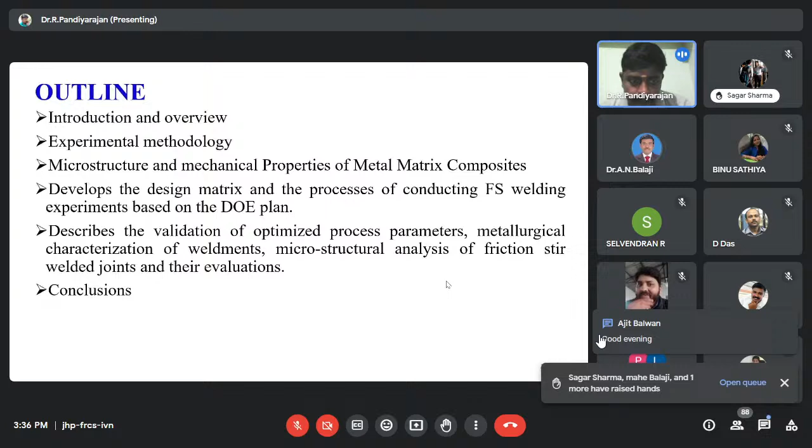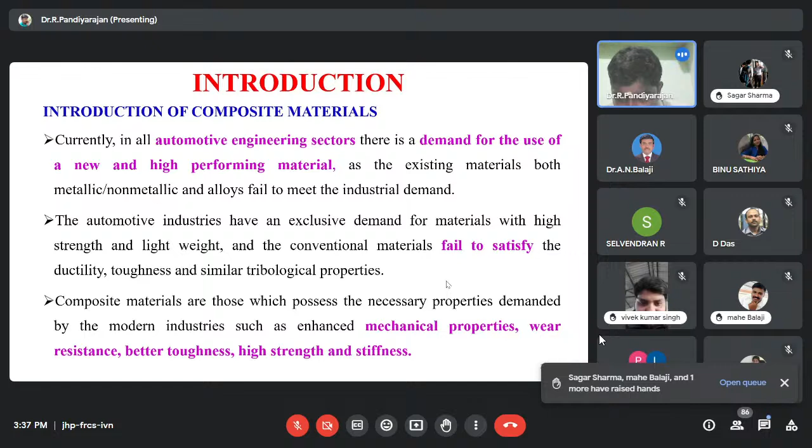The introduction of composite material: recently, all automotive engineering sectors demand new and high performance materials, but conventional non-metallic materials or alloy materials still do not satisfy the current engineering demand. So all industries focus on finding new composite materials. Composite materials alone satisfy the current engineering demand for particular properties, like mechanical properties, tensile strength, hardness, wear resistance, better toughness and high strength.

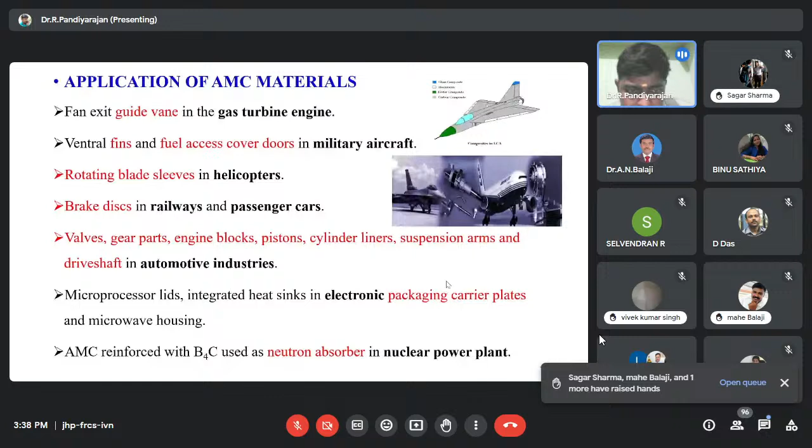The application of aluminum based composite material: there are few applications. Gas turbine engines use it particularly in guide vanes. Military aircraft use it in fins and fuel access door covers. Helicopter industries use it in rotating blade sleeves. Railways and passenger cars use it to fabricate brake disc pads. Automotive industries use it in various parts: valves, gear parts, engine blocks, pistons, cylinder liners, suspension arms, and drive shafts. Electronic packaging industries also utilize aluminum based composite material, particularly in microprocessor lids and integrated heat sinks. Boron based aluminum composite material is particularly used in nuclear power plants in neutron absorption systems. These are a few applications of aluminum based composite materials.

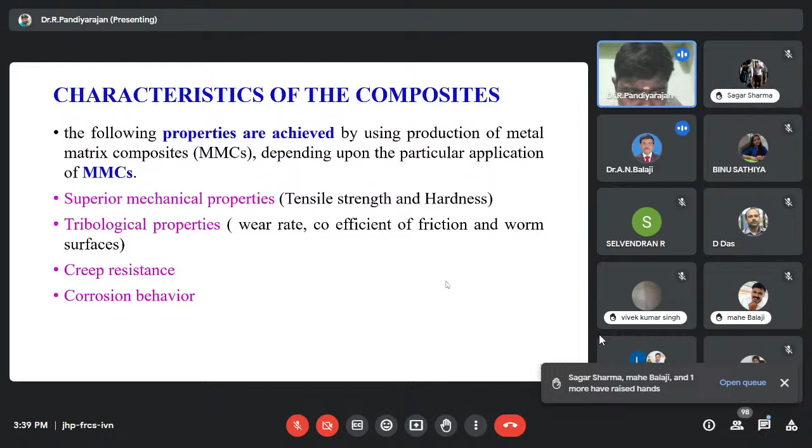The basic characterization of composite material is: compared to base metal alloy, the aluminum based composite produces maximum strength of the material. The basic properties are superior mechanical properties, tensile strength and hardness, tribological properties like wear and coefficient of friction, worn surface analysis, creep resistance, and corrosion behavior. This is the basic characterization of composite materials.

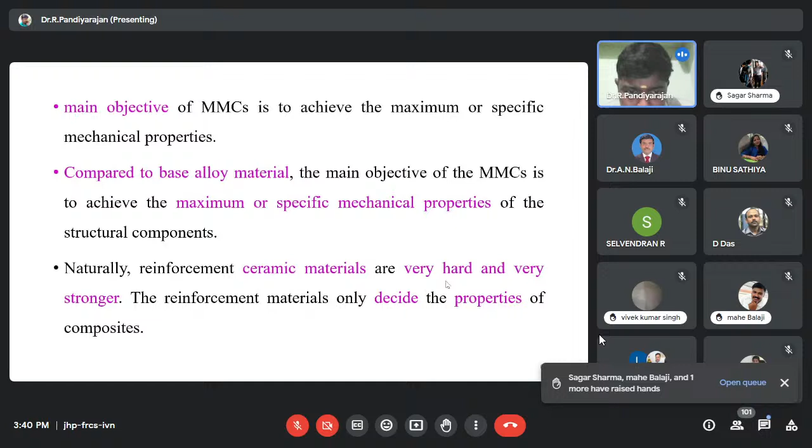The major objective of composite material is, compared to base metal alloy, to achieve the maximum or specific mechanical properties of the structural component. Naturally, ceramic reinforcement particles are very hard and stronger materials, and they alone decide the properties of the composite material. So researchers focus on particular ceramic particulates in the composite material, since the reinforcement particulates alone decide the properties of the composite materials.

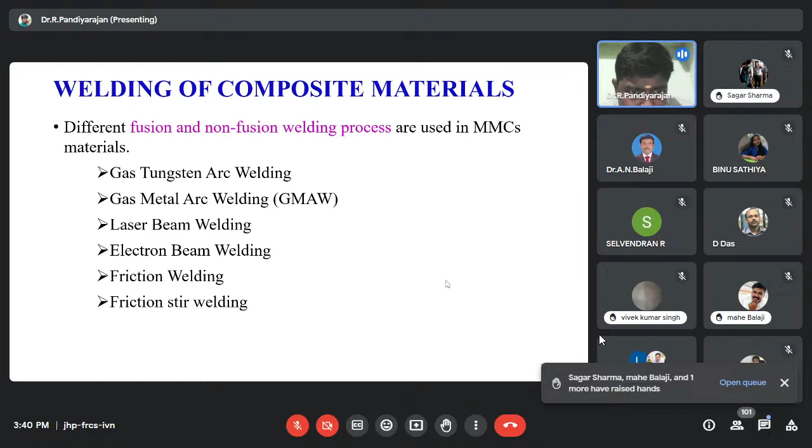There are different kinds of welding processes utilized for composite material. Particularly, there are two types: fusion and non-fusion welding processes mostly utilized. Gas tungsten arc welding, gas metal arc welding, laser beam welding, electron beam welding are fusion processes, and friction welding and friction stir welding are non-fusion processes.

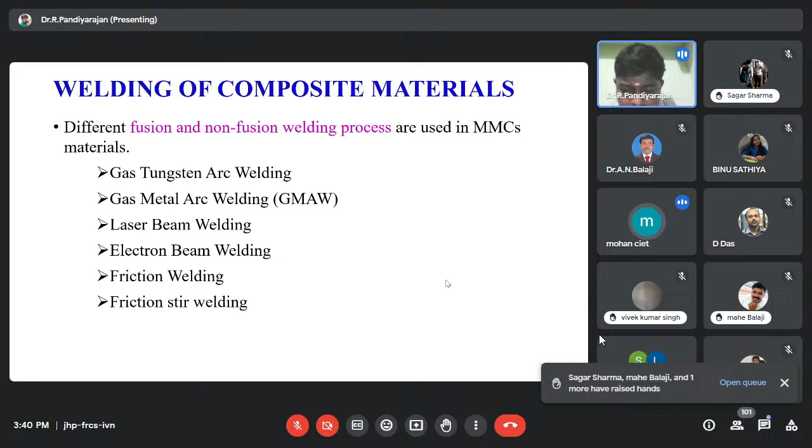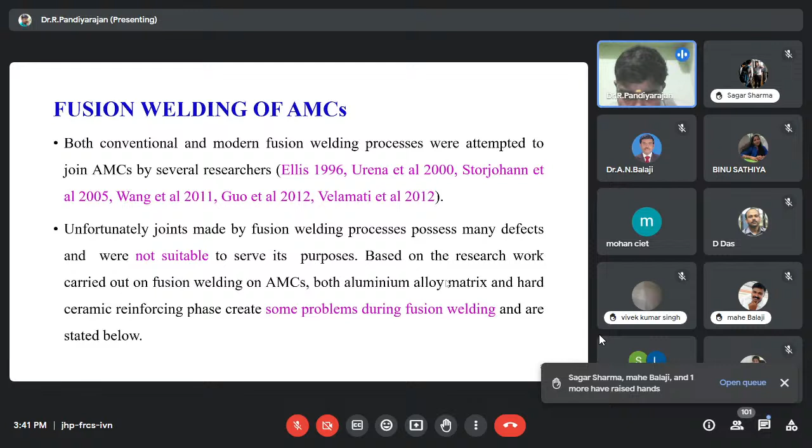From 1996 until 2023, many researchers have worked on fusion welding processes, but many researchers concluded and reported that fusion welding is not suitable for aluminum based composite materials due to some problems during the fusion welding process. Particularly, there are two problems that occur in aluminum based composite material during welding: the first problem is the problem associated with aluminum matrix materials.

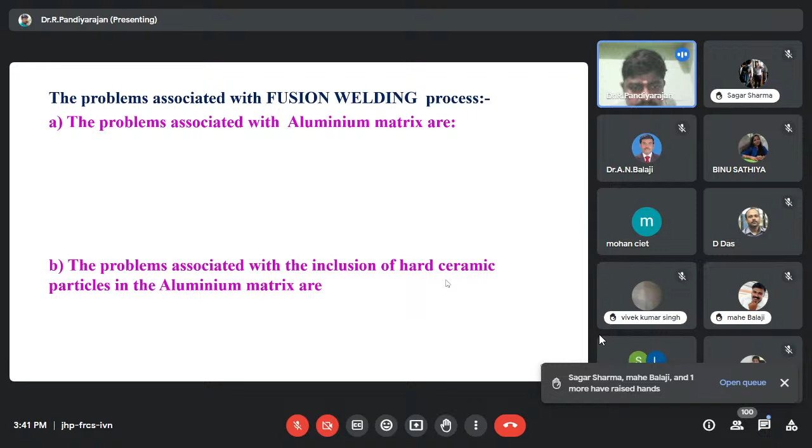Second problem is the problem associated with inclusion of hard ceramic particulates in aluminum based composite material. The first problem is aluminum matrix problem: high thermal expansion, high thermal conductivity, solidification shrinkages, incomplete mixing of parent and filler materials, coarse grain structure of weld zones, and the presence of oxides in situ. This is the major problem associated in aluminum matrix materials.

And the second problem is the reinforcement of hard ceramic particulates. There are two major problems: mismatch of coefficient of thermal expansions and the chemical reaction.

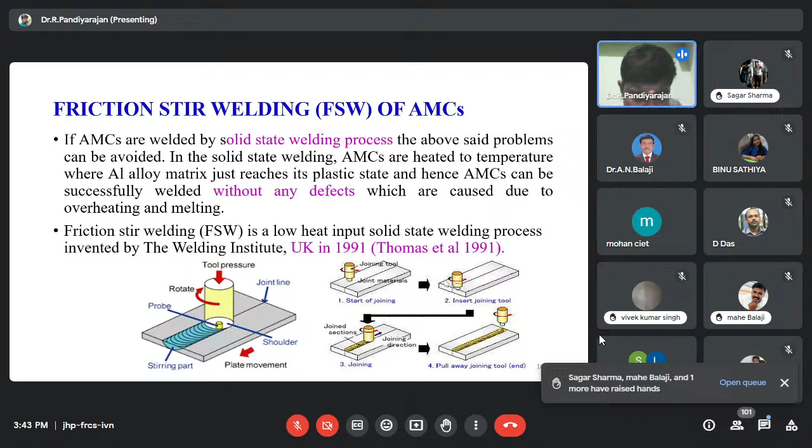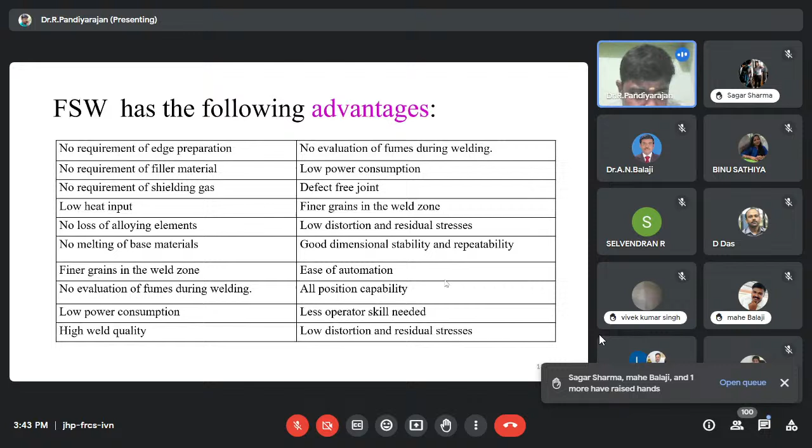There is no requirement of edge preparations, no requirement of filler materials, no requirement of shielding gas. There are many advantages in friction stir welding process.

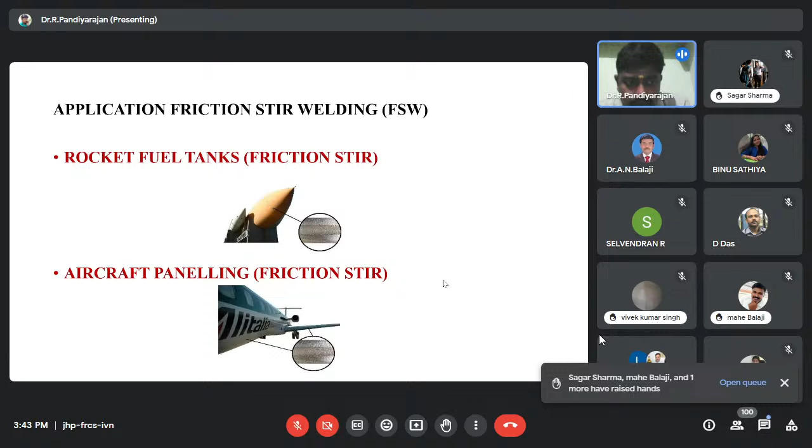Particularly, the friction stir welding process application is mostly utilized in aerospace industries. This is the sample images of aerospace engineering used in friction stir welding process.

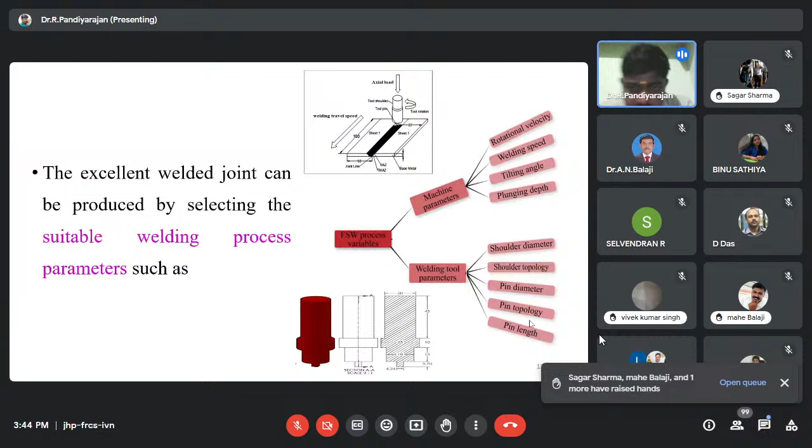Next major influencing parameter is tool parameter. The tool parameters are shoulder diameter, shoulder topology, pin diameter, pin topology, and finally pin length. These are the major influencing parameters of friction stir welding process.

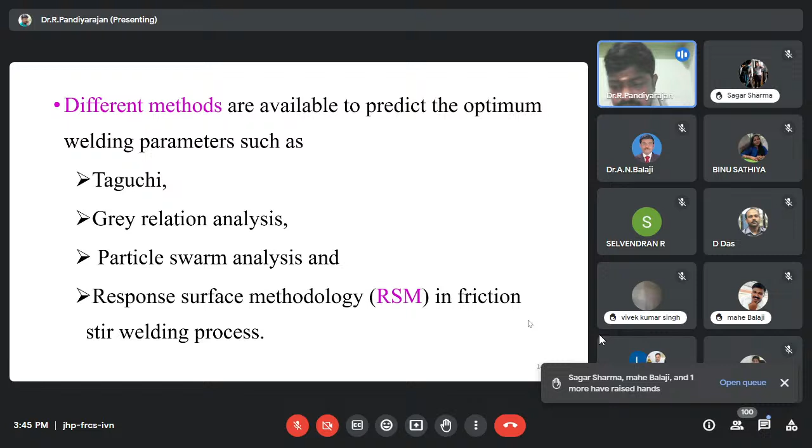There are many methods to find the optimized friction stir welding process parameters, which are the most influenced parameter to find the optimum solution. There are many techniques available in recent days: Taguchi method, gray relation analysis, particle swarm analysis, and response surface methodology. Compared to other methodologies, the RSM methodology is the easiest to find the optimum solution for influencing the input parameters of the friction stir welding process.

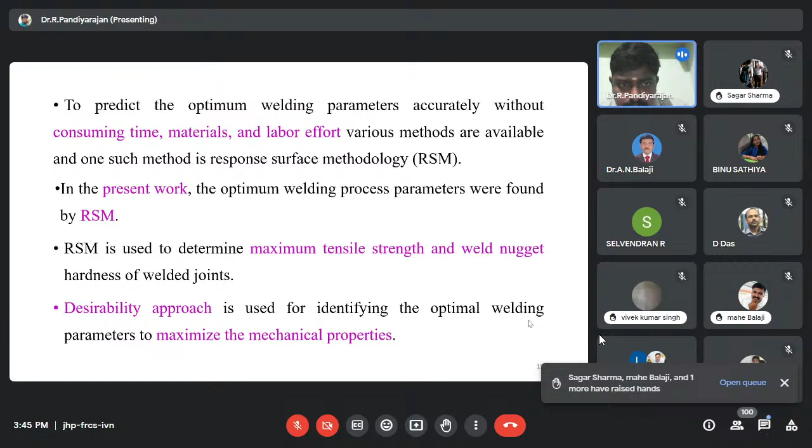The RSM methodology maximum utilizes design of experiment software. There are various types of versions of software utilized in recent days, version 8 to version 10 available. The goals or objectives for responses are expressed in terms of optimization, represented by numerical and graphical representations.

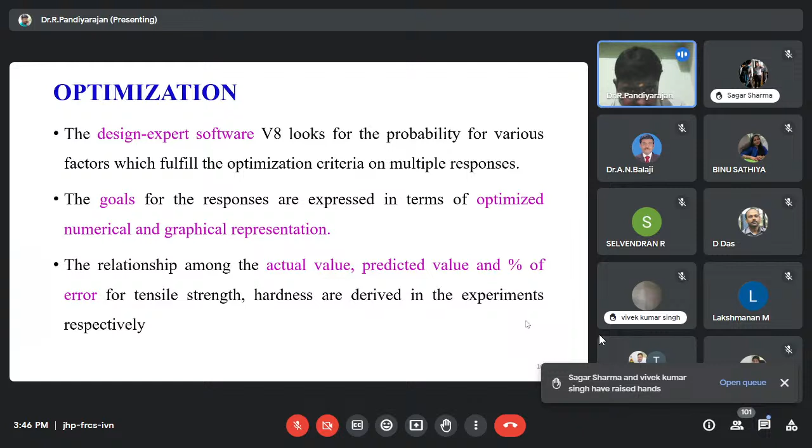The relationship among actual and predicted values, and the percentage error value, are also calculated from the output responses of tensile strength and hardness derived by the DOE experiments respectively. The actual values are pure experimental results.

The predicted value means: once we develop the DOE, find the number of experiments, do them using the experimental method, and find the mechanical characterization. Tensile strength and hardness values are input to the DOE, which directly finds the mathematical equation.

Once the session is over, I will display with the design of experiment software how we will use it. I will demonstrate at the end of the session.

Once we develop the mathematical equations, the contour plot is used to define and superimpose or overlay the critical responses, making visual search possible.

Once we find the optimum solution for the friction stir welded process parameter, we again have to test it with an experimental validation test result. The validation result is very important.

Once again, we make 3 to 5 trials one more time, compare experimental and predicted values, and also find the percentage of error. The percentage of error less than 5% means we can definitely use the optimum process parameter, producing good quality welded joints.

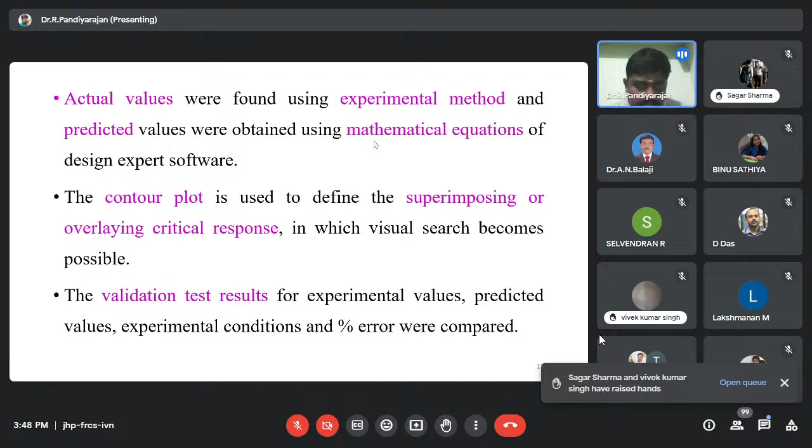This is the overall experimental methodology followed for metal matrix composite using the friction stir welding process parameters. The first step is material selection. The composite material selection is very important in research.

The composite material consists of two materials: one is a matrix material, another is a reinforcement particle. The matrix material is particularly chosen from your application point of view. For this session I will take AA6061, a wrought alloy, as the basic alloy. We use this matrix material along with reinforcement particulate. This session I will use two types of reinforcement particulate. One, the primary reinforcement particulate, is ZrO2, and the secondary reinforcement particulate is graphite. This is the material selection.

Second is the fabrication of metal matrix composite material. There are different types of fabrication methods available in metal matrix composite material, but this session we focus on the stir casting method, because this method is available in many engineering colleges in Tamil Nadu, so we use the stir casting method. Once we fabricate the metal matrix composite material, we find the characterization of the metal matrix composite material at different weight percentages.

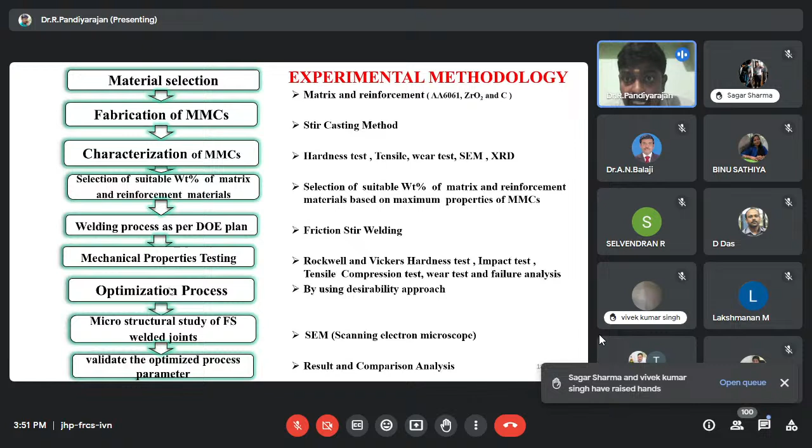Once the mechanical properties are done, we input them to the optimization technique to find the optimized process parameter, and we also find the mechanical and metallurgical characterization of the welded joint. This is the overall flow of friction stir welding of aluminum based composite materials.

This is the example of selection of matrix material. This session I will consider only AA6061 alloy, a basic wrought alloy. AA6061 alloy is selected as matrix based on better thermal conductivity, low density, easy processing, and better castability and weldability of the material. Once we buy the AA6061 alloy, we definitely find how much percentage of each composition is in the material: silicon, ferrous, copper, magnesium. You find this by spectrometer analysis, confirm the composition, and confirm the wrought alloy.

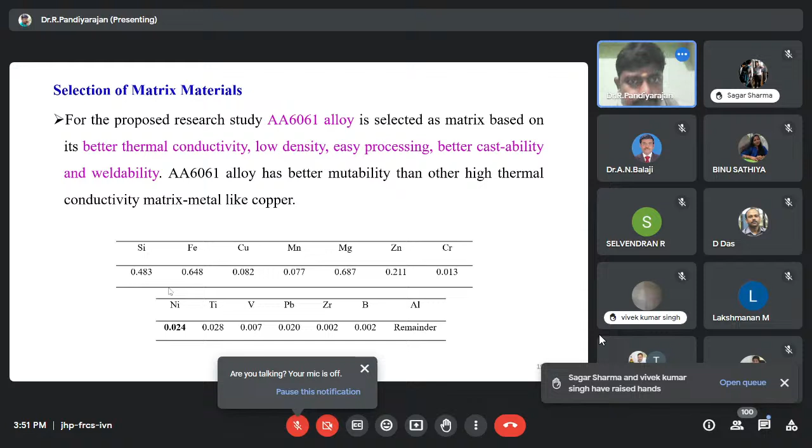AA6061, and the selection of reinforcement particles - this is the most important session, choosing the reinforcement particulate. This session I will consider two types of reinforcement particulate: ZrO2, zirconium dioxide, and graphite. ZrO2, zirconium dioxide, has the most responses in multi-industrial and technological applications in recent material studies. This is due to its immense mechanical properties, low thermal expansion, less cost, and thermal conductivity also. ZrO2 is only used to improve the mechanical properties of the composite material, and we also utilize graphite.

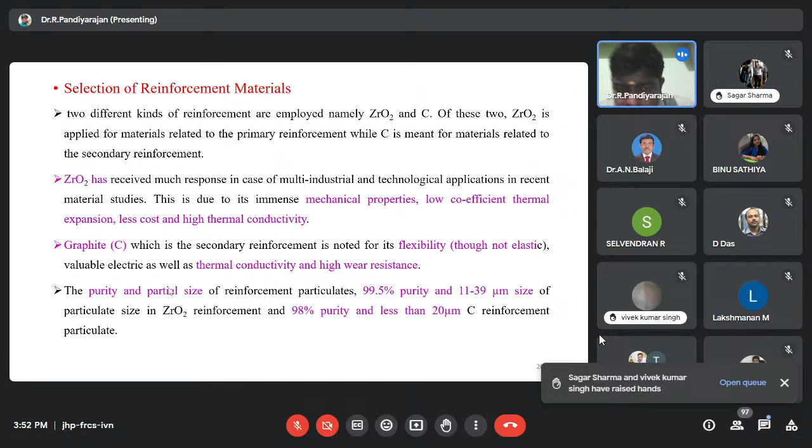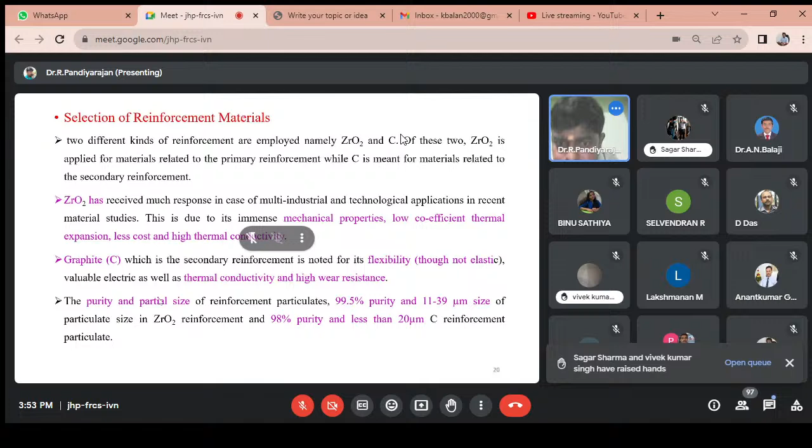Graphite is a secondary reinforcement particulate. It is used to improve the tribological behavior of the composite material. Once the researcher buys both materials, the matrix material and the reinforcement particulate, we definitely check the purity and particle size of the matrix and the reinforcement particulate. There are many types of purity available in the market. From a research point of view, we need more than 90% purity and less than micron size also.

Definitely measure that. After this, we fabricate the metal matrix composite material using the stir casting method. This is a sample experimental image of the stir casting method. The furnace is maintained at a minimum of 1000 degrees Celsius to 1500 degrees Celsius. Based on the matrix material, we set the temperature, and the stir speed is a minimum of 350 to 450 RPM, maintained within 5 to 10 minutes minimum.

It is compulsory that the reinforcement particulates are preheated to 350 degrees Celsius to 500 degrees Celsius, to remove the moisture content of the reinforcement particulate. Suppose you do not preheat the reinforcement particulate - there are many defects produced in the metal matrix composite material. So definitely you have to preheat the reinforcement particulate.

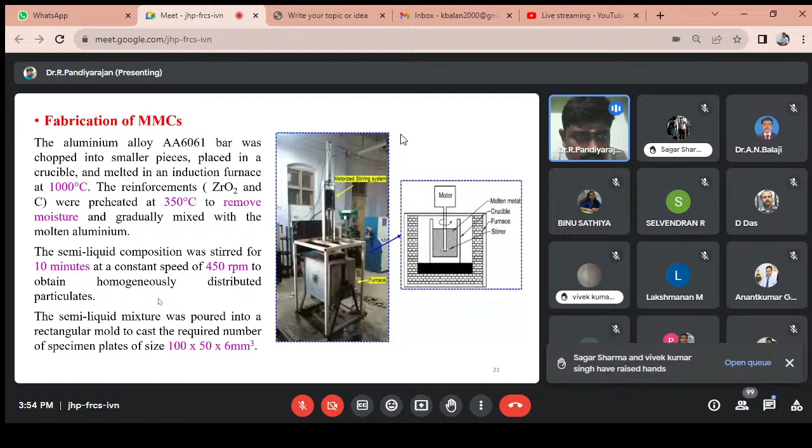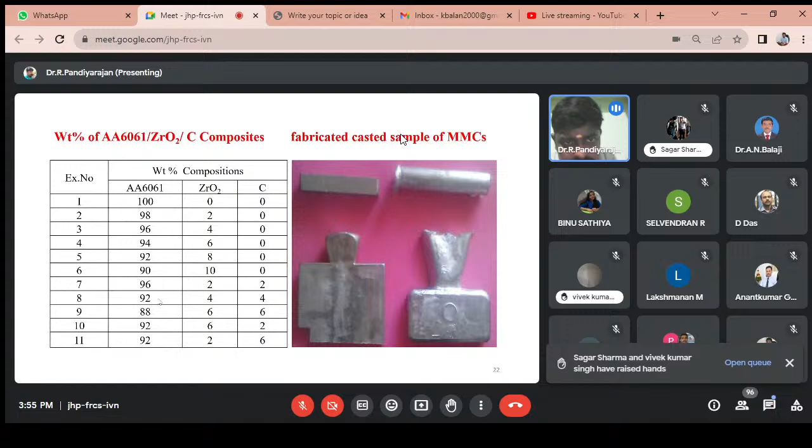For example, the first experiment, experiment number 1 to experiment 6, is a composite material adding only ZrO2 material. And from the 7th experiment to the 11th experiment, we conduct the hybrid metal matrix composite material, where we add both reinforcement particulates, ZrO2 and graphite.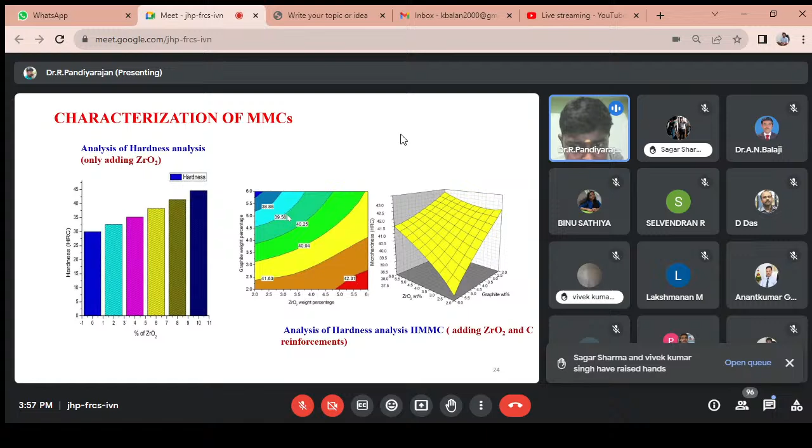Similarly, for the hardness analysis of the composite material, the x-axis shows the ZrO2 particle. The first image shows only ZrO2 particulate added in the metal matrix composite material, and the second and third images show the hybrid metal matrix composite material, as previously discussed.

The x-axis shows the ZrO2 particulate and the y-axis shows the graphite weight percentage. The z-axis shows the hardness value of the metal matrix composite material. This graph, in 2D and 3D plots, clearly shows which reinforcement mostly affects the metal matrix composite material.

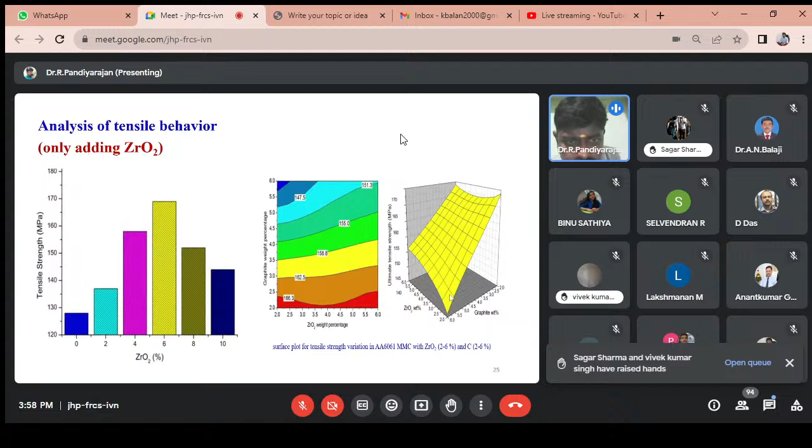The researchers do one thing: if you add only one reinforcement particulate, a bar chart or pie chart is enough - there's no issue. But if you fabricate a hybrid metal matrix composite, you have to show 3D and 2D contour plots, which means your paper will definitely be accepted in the highest ranges of SCI, Q1 and Q2 journals. Do the research work properly and the best paper will be accepted in many reputed journals.

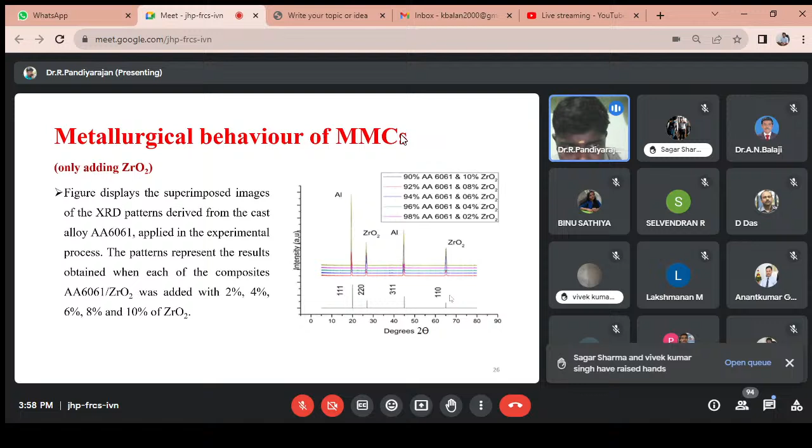Only adding ZrO2 particulate - this is the example diagram. Next, the image shows the hybrid composite material adding ZrO2 and graphite particulate. Both XRD values are compared with the standard value in JCPDS data.

The JCPDS data is very important - it's a standard data. In an XRD pattern, it definitely shows peaks - how many peak values, how many percentage will occur in the composite material. The standard data is there in JCPDS data, so you compare with your result and the result will be confirmed.

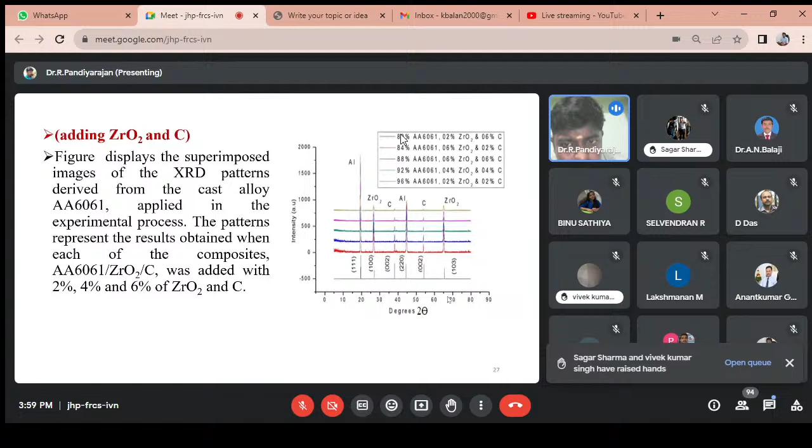Suppose any error occurs in the polishing method or roughing method, to reflect this JCPDS data, we will modify the result and take the test again.

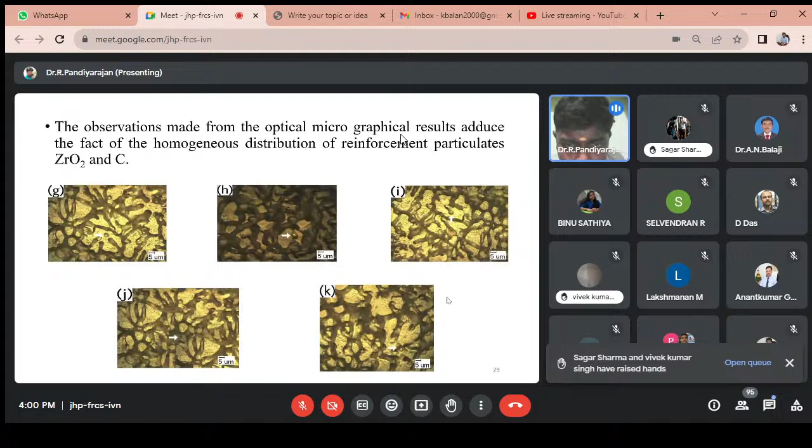Similarly, this is only a magnification difference. Our previous images show the OM analysis - optical microscope analysis - and the next image is a SEM analysis. It's the same.

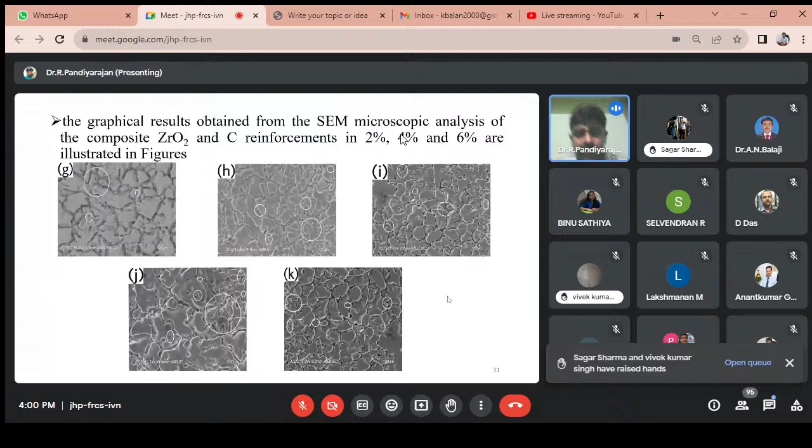Suppose you want to check the micron size or the grain size - there is an easy calculation. The circle is there, and you calculate the size. There is a formula to apply, and they find the number of grains in a particular size.

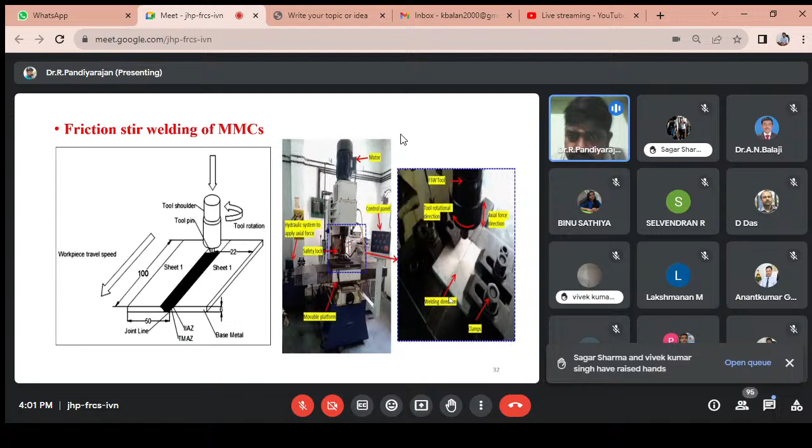This is the basic and fundamental process of friction stir welding. The first image is a principal diagram of the friction stir welding process, and the next is an experimental machine of friction stir welding. All the colleges have vertical milling machines available - you have to change them with some adapter to use them as friction stir welding machines also.

There are different types of tools used in the friction stir welding process. The tool material, high carbon and high chromium steel, was used to make the weld tool - specifically high carbon and high chromium D2 steel.

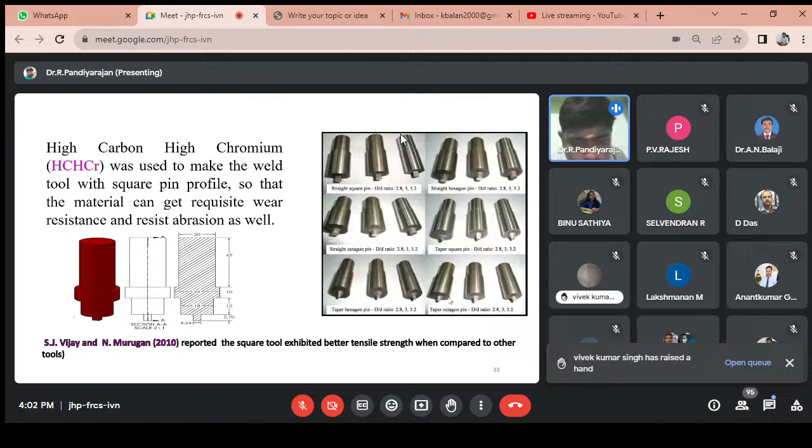In 2010, Dr. Murugan reported that compared to many other tools, the square pin tool maximized the tensile strength and produced high weld quality. Ashok Kumar from SRM Madurai campus, in a 2019-20 publication, also concluded in a session on tool parameter optimization that threaded and square pin tools only produce maximized tensile strength. So in this session we will consider the square pin tool utilized in the friction stir welding process parameters.

This is the friction stir process parameter optimization in stir casting of aluminum-based composite material. The Box-Behnken experimental design, with 3 factors and 3 levels, was used to minimize the number of experiments. By correlating the significant welding process parameters using linear regression equations, we determined the ultimate tensile strength and hardness of friction stir welded composites using statistical design expert software.

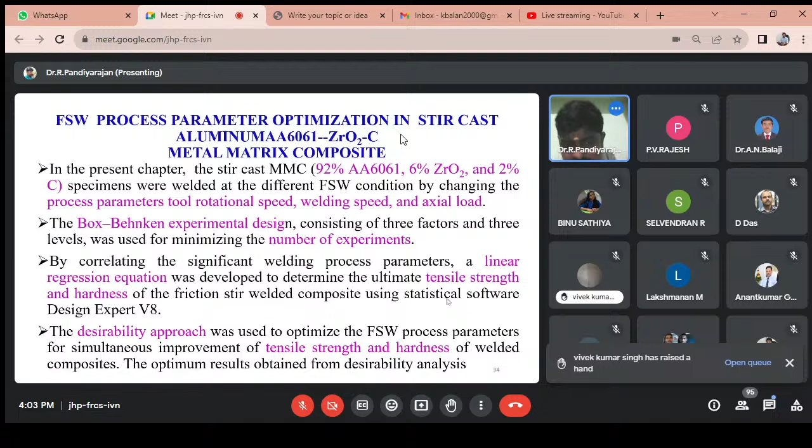The optimization technique and Box-Behnken method were used to find the optimum solution by applying desirability approaches, optimizing the friction stir welding process parameters for simultaneous improvement of tensile strength and hardness of welded composites. The optimum result was obtained from the desirability analysis. This is the systematic approach followed to find the optimum solution for friction stir welded aluminum-based composite material.

Step number 1 is material development. This means we have to fabricate the composite material. We have to prepare it using a work holding device, with 100 mm length, 50 mm width, and 6 mm thickness. Material preparation is done by using a wire cut EDM machine. This is the material development process, step number 1.

Step number 2 is material processing. We have to identify the friction stir welding process parameters. There are many parameters affecting the weld quality, so researchers focus on which parameter mostly affects the result. We have to choose 3 level, 4 level, or 5 level for the parameters. In this session, we consider 3 level parameters: tool rotational speed, welding speed, and axial load.

Step number 3 is process parameter correlation. For this, we choose the Box-Behnken method, which is used to develop the design matrix using a certain number of trials. After developing the design matrix, we fabricate the weld joints and perform testing and characterization. These testing and characterization values are then input into the Box-Behnken method to develop the linear equation using ANOVA (analysis of variance), and we develop the mathematical equation and find the error percentage of the mathematical equations.

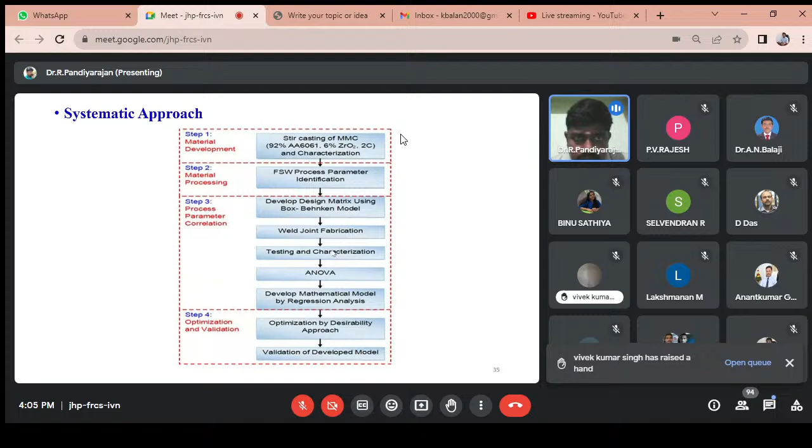This is followed in the friction stir welding process parameter identification optimization technique: the development of the design matrix using the Box-Behnken method. We use 3 levels and 3 factors: tool rotational speed, welding speed, and axial force, each considered at 3 levels.

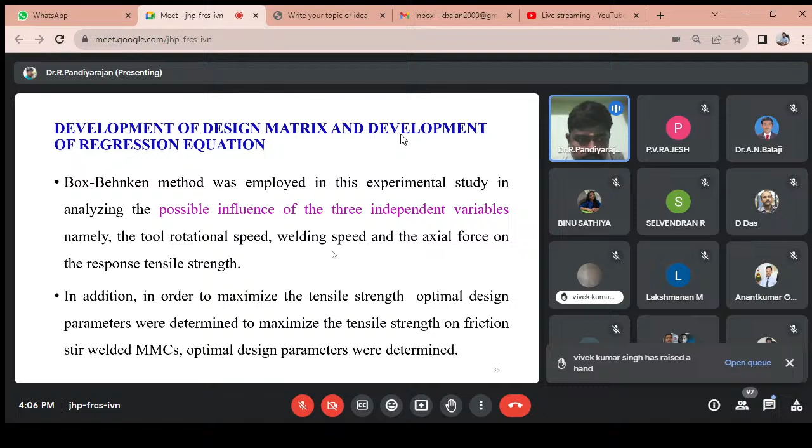In addition, in order to maximize the tensile strength. The optimal design parameters were determined to maximize the tensile strength of friction stir welded metal matrix composites, and these optimum design parameters were determined using desirability approaches.

For example, we choose 3 levels. The tool rotational speed minimum range is 600 rpm and the maximum range is 1000 rpm. The welding travel speed minimum is 45 mm per minute and maximum is 55 mm per minute. The axial force minimum is 4 kN and maximum is 6 kN. These are the 3 process parameters with 3 levels each.

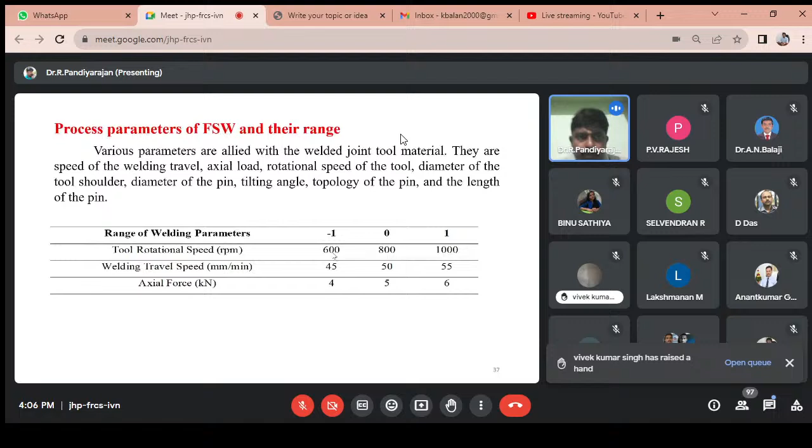We consider these input process parameters in friction stir welding and use the Box-Behnken method to develop the design matrix with 17 number of trials. After obtaining the 17 trials, we carry out the experimental friction stir welding process and characterization, and those values are input into the Box-Behnken design matrix.

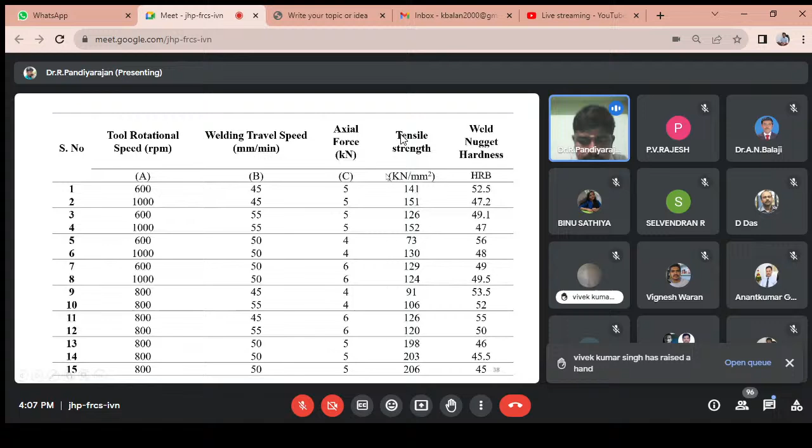We develop the polynomial equation for the experimental data using the linear regression method. The model is based on a quadratic pattern, and we apply the analysis of variance (ANOVA). The interaction terms and significant responses were identified using F-statistics approaches applied in evaluating the significant parameters. This is the sample equation of output responses for tensile strength and hardness.

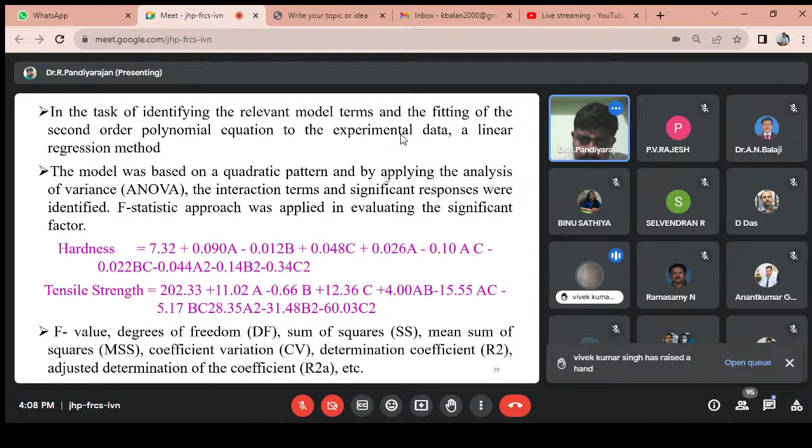Once we develop the mathematical equations for output responses in hardness and tensile strength, we check with actual and predicted value of output responses. The actual value means pure experimental results, which is 100% accurate. Predicted means we have developed a mathematical equation, and this is the mathematical result. If both error percentages are very less, we take the mathematical equation as okay.

The R-squared value is reflected by the error percentage of the mathematical equation. More than 0.95 means the R-squared value is good, and you take the optimum solution of the process parameter in the linear regression equation. If less than 0.90, you don't take the equation; we have to change the model and design matrix and redo the mathematical equation.

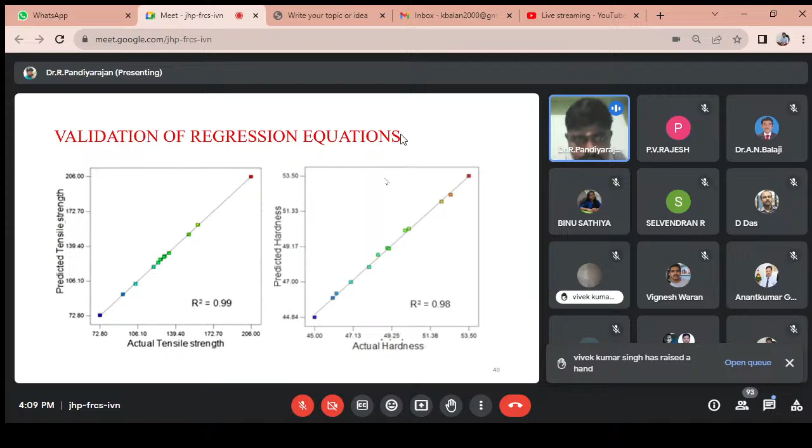After that we use linear regression models, and the error percentage is very less. We plot the perturbation plot. The perturbation plot clearly shows the 3 input process parameters we took: tool rotational speed, welding speed, and axial load.

Compared to the other 2 parameters, tool rotational speed mostly affects hardness and tensile strength. So the most influential parameter is tool rotational speed, and it must be carefully decided.

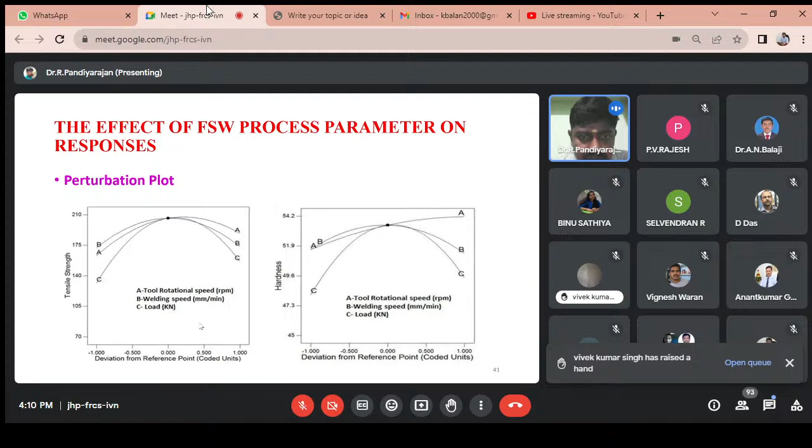We have to produce good quality welded joints in aluminum-based composite materials. The perturbation plot is used to identify the influence of input parameters, and the contour plot makes it easy to identify and visualize which parameter produces the highest tensile strength. For example, the left side shows the 2D contour plot and the right side shows the 3D contour plot. The x-axis shows tool rotational speed and the y-axis shows welding travel speed.

On the x-axis, we take 600 to 1000 as the minimum and maximum range. On the y-axis, we take welding travel speed, minimum 45 to 55. The maximum tool rotational speed of 850 to 900 and travel speed of 50 to 55 produces the maximum tensile strength. The graph clearly shows which parameter mostly produces the maximum strength of the welded joints.

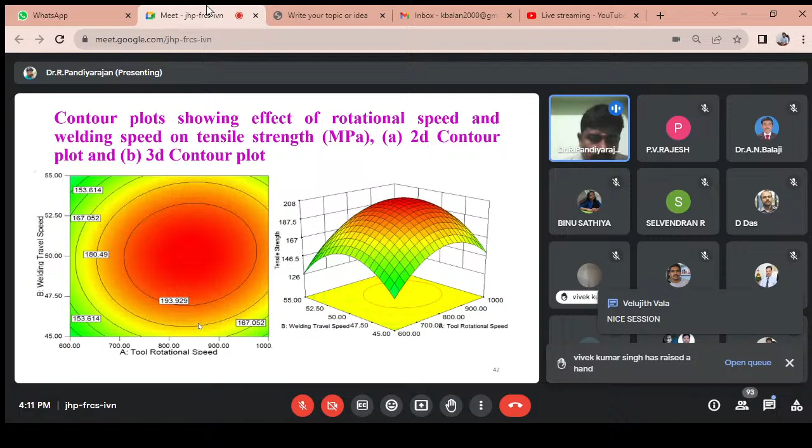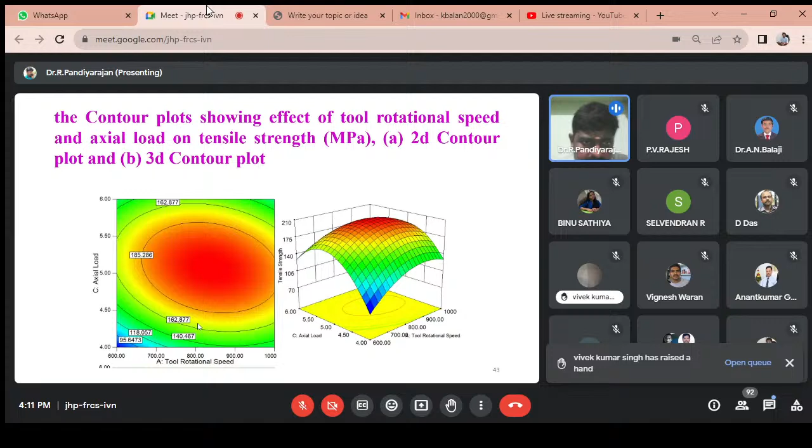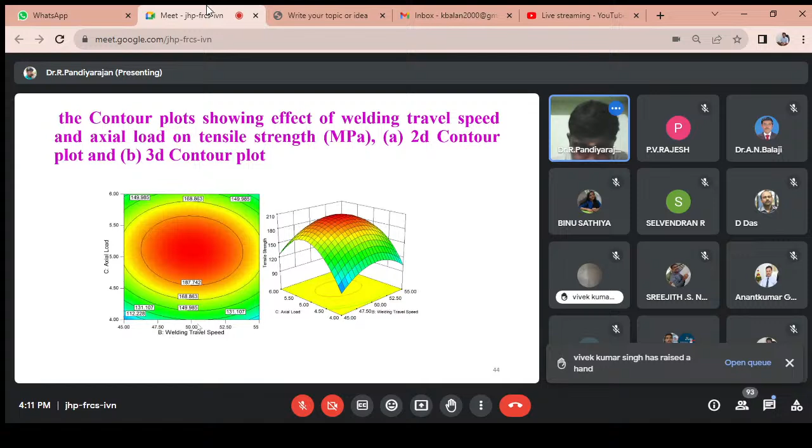The similar next contour plot is for another two parameters, axial load and tool rotational speed, for 2D and 3D contour plots. The plot is always displayed using design of experiment software, taken as per the mathematical equation we developed for the contour plot. This is another correlation of two parameters, axial load and welding travel speed, for tensile strength, and the next contour plot also shows the output responses.

Another response, hardness, is also considered along with tensile strength. This is a basic property we take into this session. There are two parameters considered in this image: one is tool rotational speed, the other is welding travel speed. The maximum tool rotational speed of 1000 rpm and 55 mm/min only produces the maximum hardness of the welded joints.

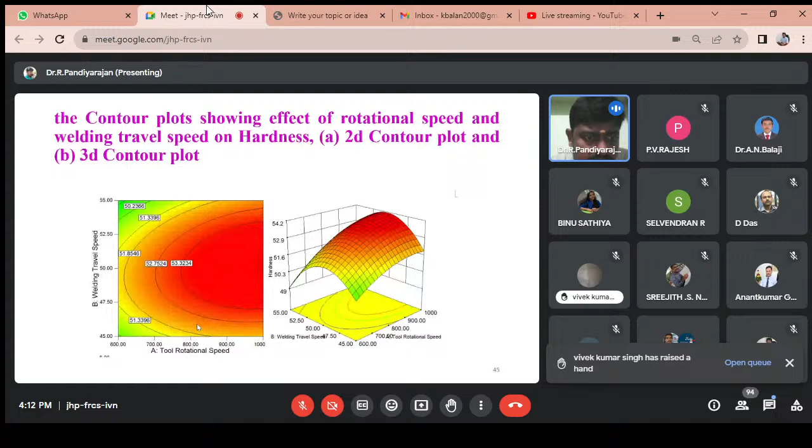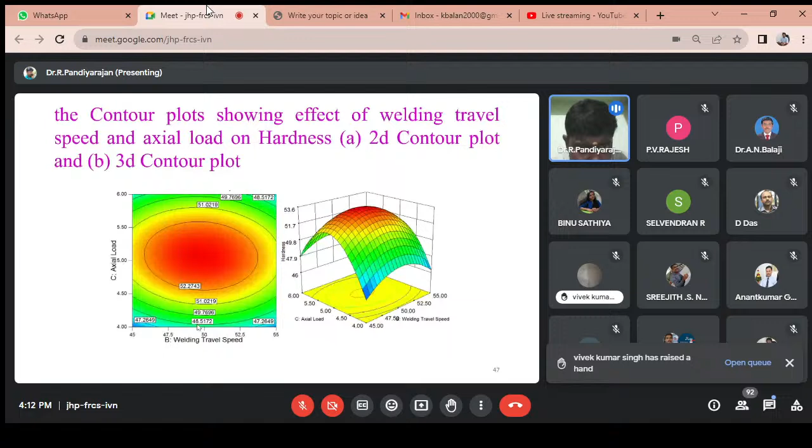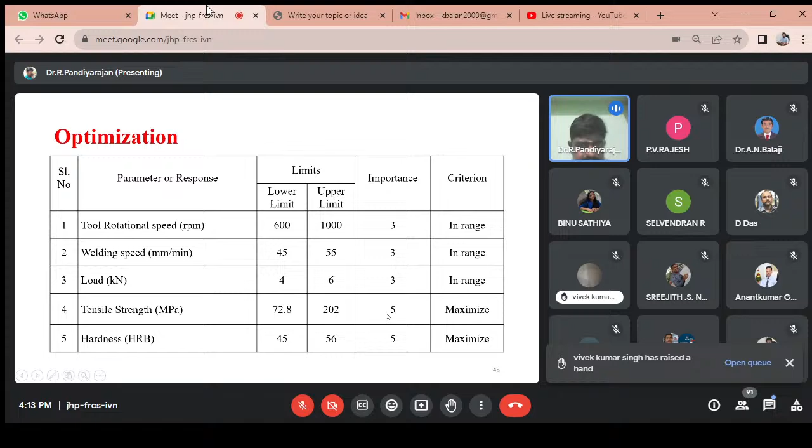After that, we set up the desirability approach for the input responses: tool rotational speed, welding speed, and load. These are the input process parameters. We set importance as 3 and maintain criteria in range. The output responses for tensile strength and hardness are maintained at level maximize and 5. Importance is maintained using the desirability approach.

Once we set the input parameters for the desirability approach, we plot the overlay plot. The overlay plot shows the optimum process parameter for the friction stir welding process.

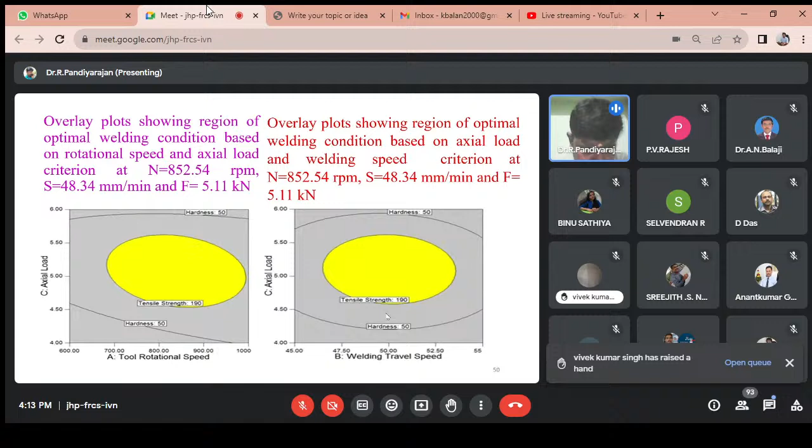Once we find the optimized process parameter, again we have to validate the results, using 3 or 4 experiments, and check the actual and predicted value and percentage of error. If the percentage of error is less than 3, in the 3 to 5 range, the validation is okay. Suppose the error percentage is more than 10, again we have to re-evaluate the mathematical correlation, the linear regression equation, test with samples again, and validate the results again.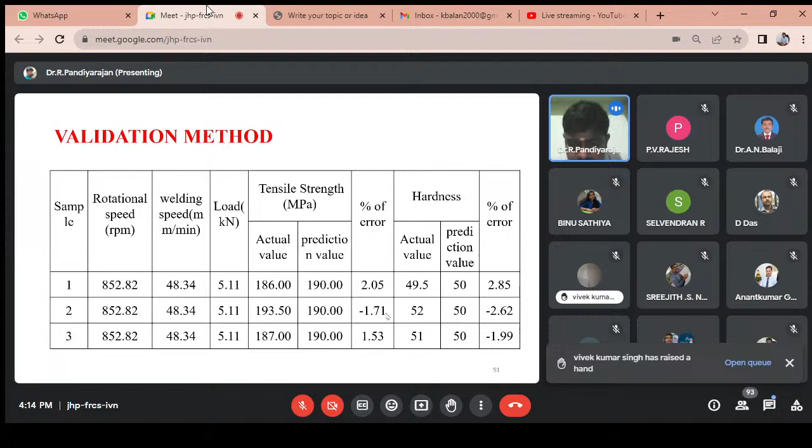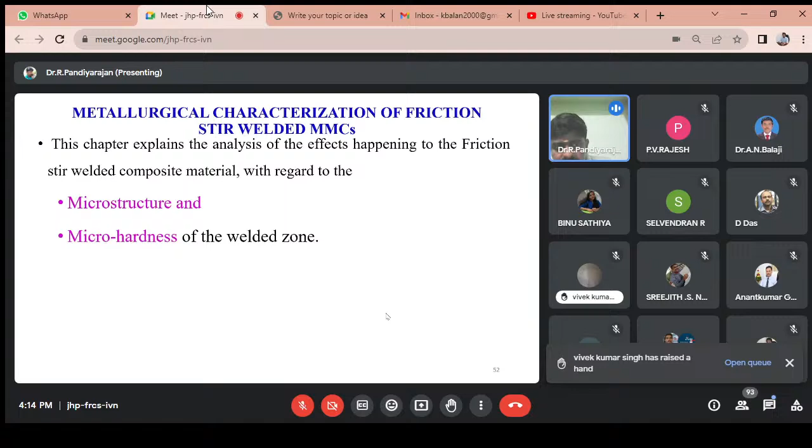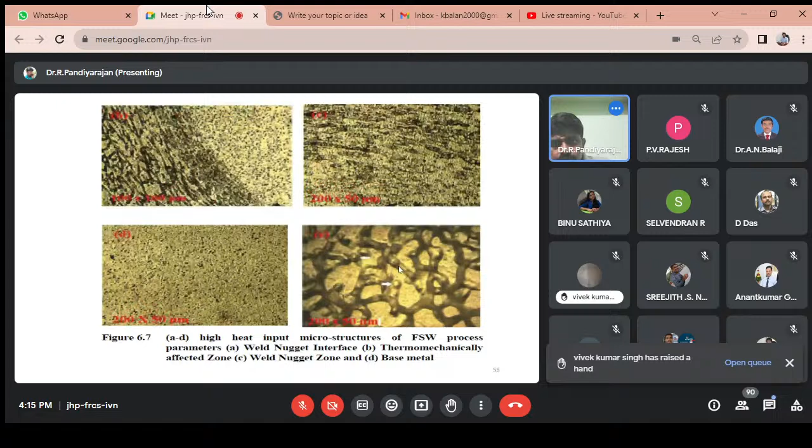Finally, we checked the metallurgical characterization of the friction stir welded metal matrix composite material using microstructural and macrostructural analysis with optical microscopy images. The images clearly show A to D as high heat input microstructures from the friction stir welding process. The first image shows the weld nugget interfaces, the second shows the thermomechanically affected zone, and the third shows the weld nugget zone. The fourth image shows the base metal of the composite material. This is the sample image of microstructure analysis in welded joints at optimized process parameters.

Finally, we calculated the hardness survey of each material, checking the hardness value every 0.1 mm. Compared to the base metal alloy, the hardness at the weld nugget center point will be high. Based on the matrix and base metal, there may be changes in the hardness value. This is the hardness survey of the welded joint of aluminum based composite materials. This is the sample image.

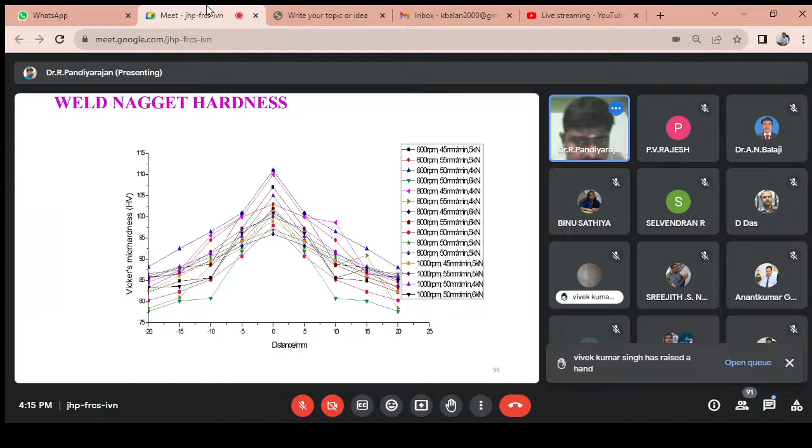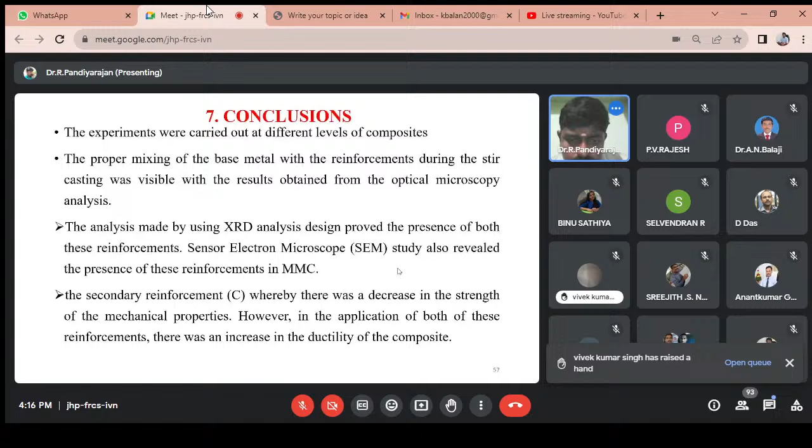And finally, the conclusions. The experiments were carried out at different levels of composites through proper mixing of base metal and reinforcement during stir casting, visible in the results obtained from the optical microscopy analysis. The metallurgical characterizations using XRD, OM, spectrometer analysis, and EDX help achieve homogeneous distribution of the metal matrix composite material. Primary reinforcement materials focus on improving particular mechanical properties of the composite material, while secondary reinforcement materials are used to improve the tribological behavior of the composite material.

Once we find the best weight percentage of the aluminum based composite material, we perform the friction stir welding process parameters and find the optimization technique to determine the most influencing parameter. We also use metallurgical characterization of weldments through OM analysis across different zones, and the hardness survey is also done using the optimized process parameters.

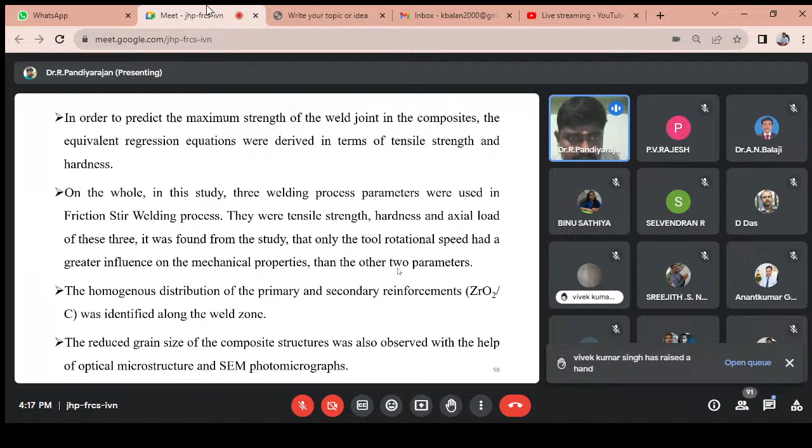Before this session, for example, dear participants, this is the Design Expert software, version 13.

Sir, just one minute, sir. Actually, I will show some other design. You make it a new design.

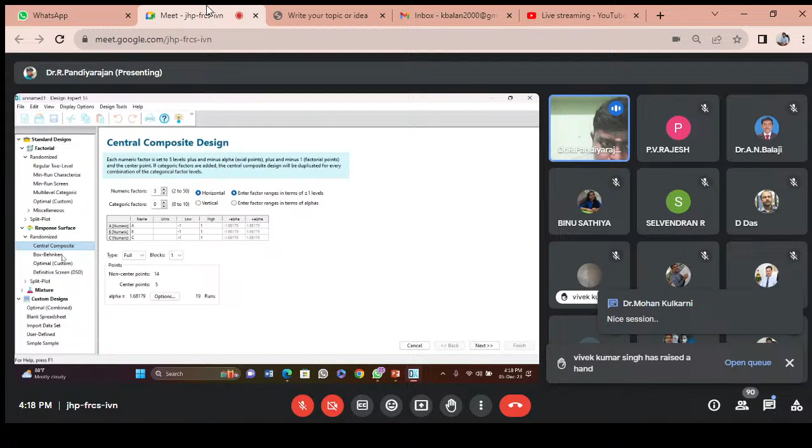Response surface methodology: we use different methods available in RSM, such as central composite design, Box-Behnken method, or customized design. The Box-Behnken method means we set factors at 3, 4, or 5 levels. We set the tool rotational speed, minimum range, say 600 to 1000, and welding speed.

Researchers use the RSM software, setting parameters like 45 to 60, and axial load 4 to 6 - I will put these randomly as an example, as it's the easiest method for finding the optimized solution.

The responses mean the output responses, such as tensile strength and hardness. For tribological properties as well, we can include another response.

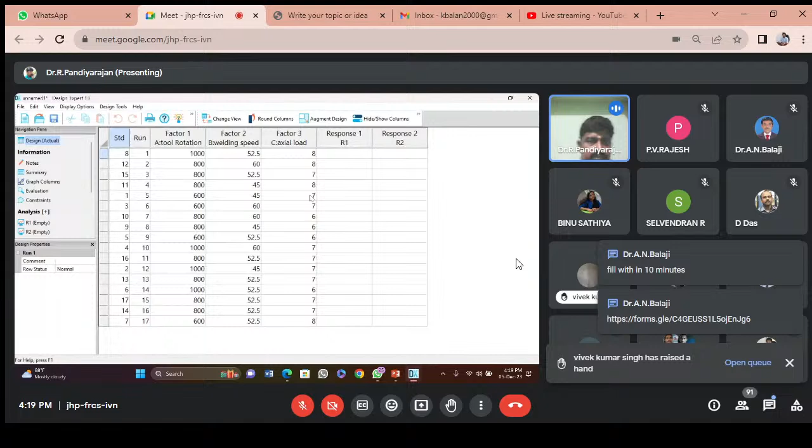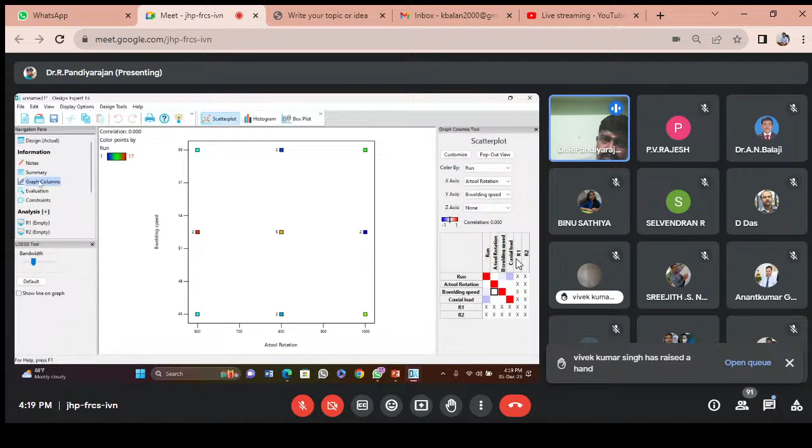This is the design of experiments used to find the number of trials. Once we determine the design of experiment, we get experimental results for tensile strength and hardness. We include the tensile strength and hardness values, and also try including other data, making it easy to find numerical and graphical representations for the optimized solution of the influencing parameters.

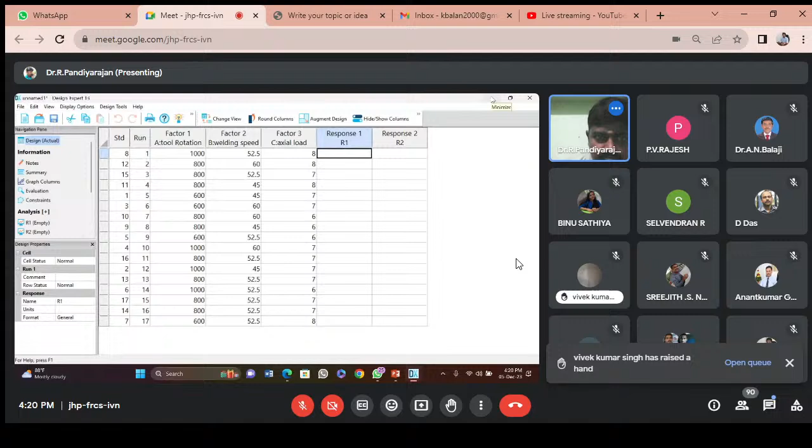This is not actually a hands-on section. If you need help, definitely send an email, and I will definitely help with the design of experiments for the participants.

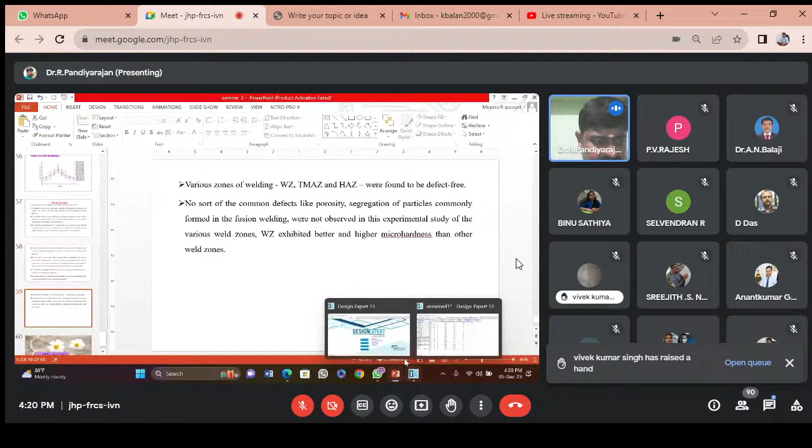Sir, before ending this session, I want to say a few words, just 2 minutes. Dear participants, actually, sorry sir, just 2 minutes please.